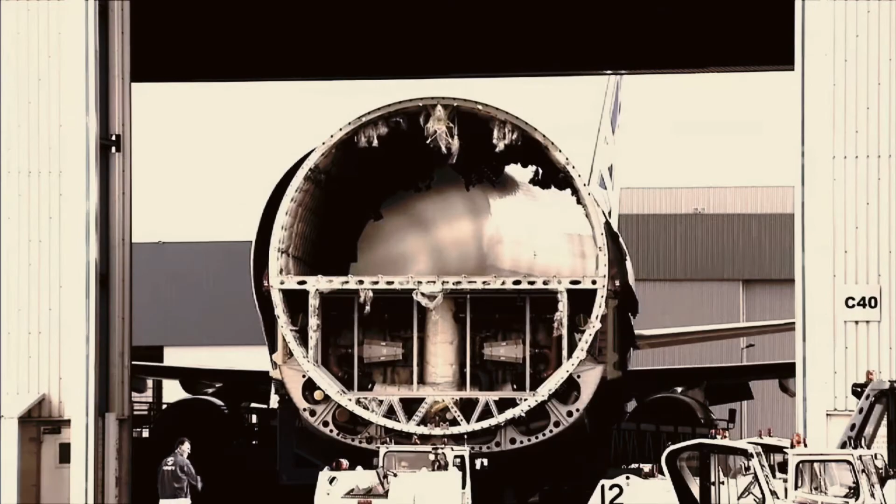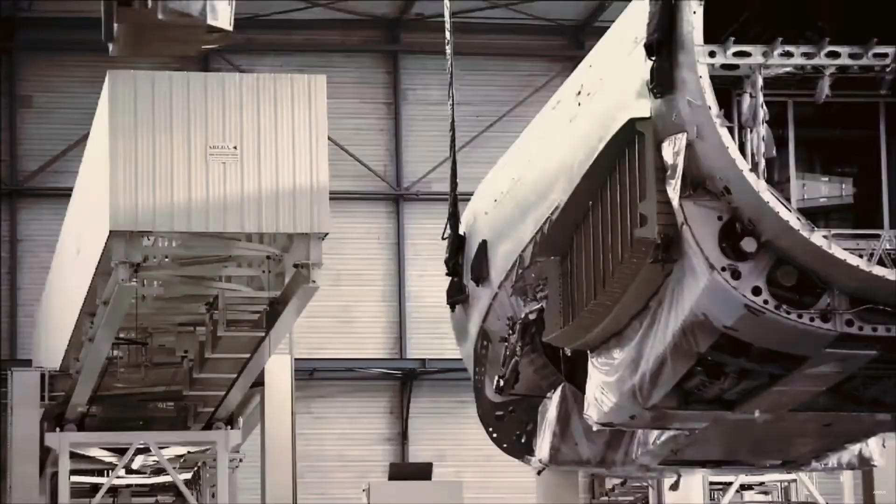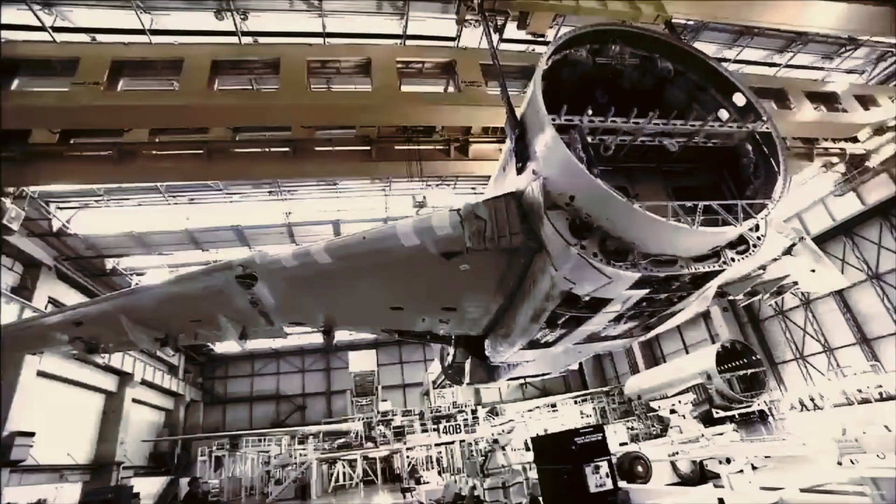The details of what happens next in the story of 447 are complex. Unlike other presentations on the subject, the objective here will be to give the viewer an in-depth understanding of Airbus design philosophy and a deeper understanding of how the relevant systems on the 330 actually work.

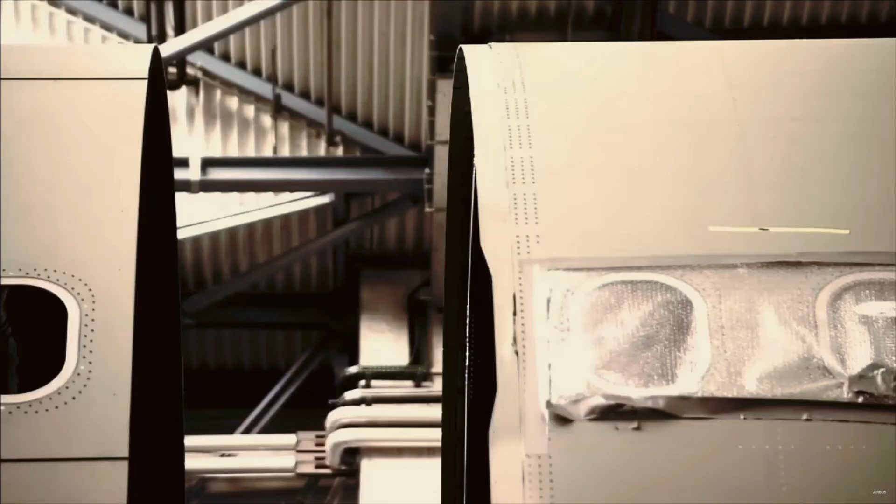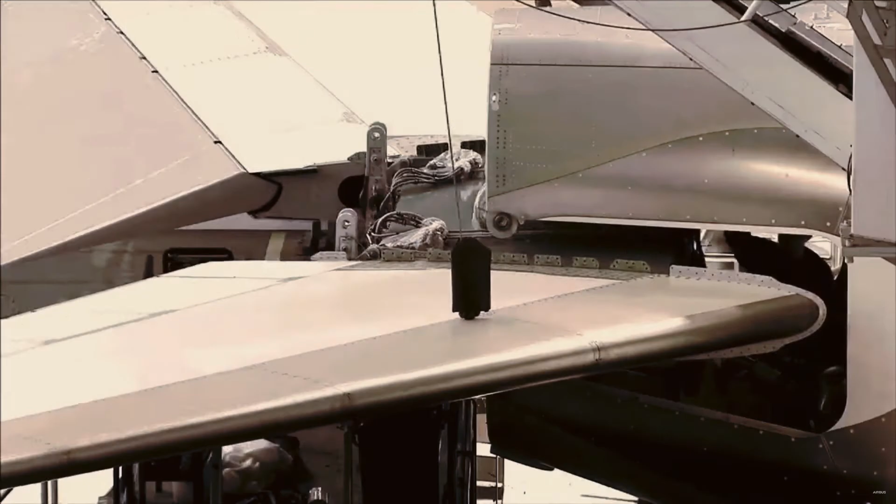In doing so, the hope is that you'll be better placed to understand what the pilots did, how the aircraft behaved, and why at times the interaction between both was less than efficient and ideal. The finer points of our excellent investigation can often prove difficult to comprehend, and without this comprehension, the true story behind the facts can remain elusive and frustrating.

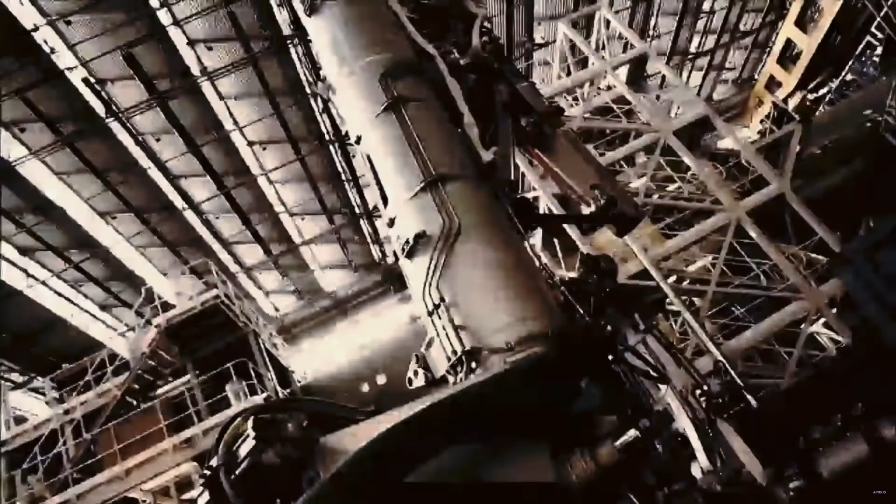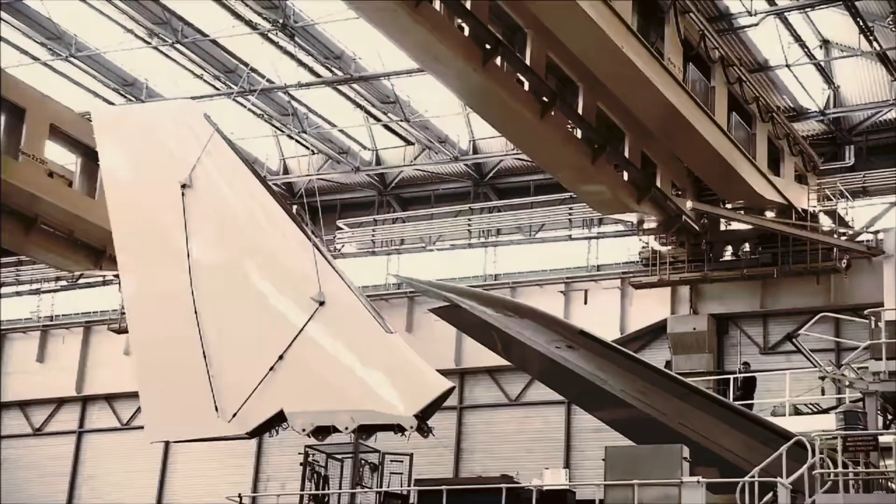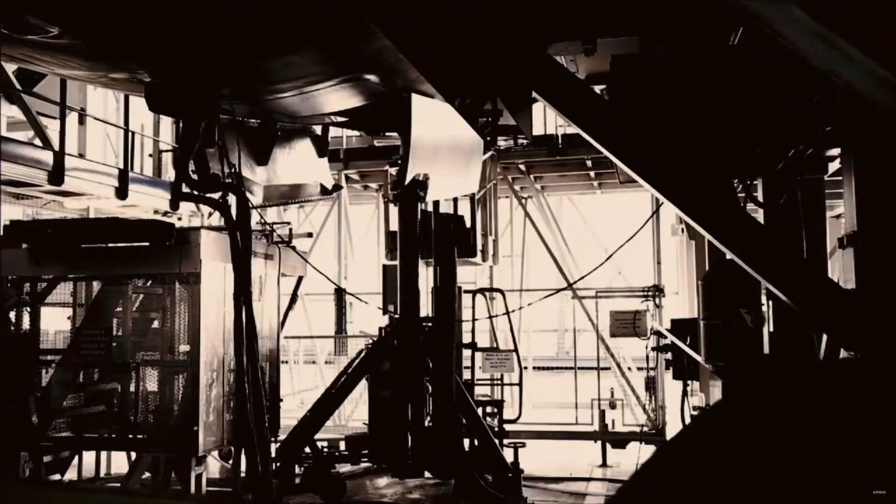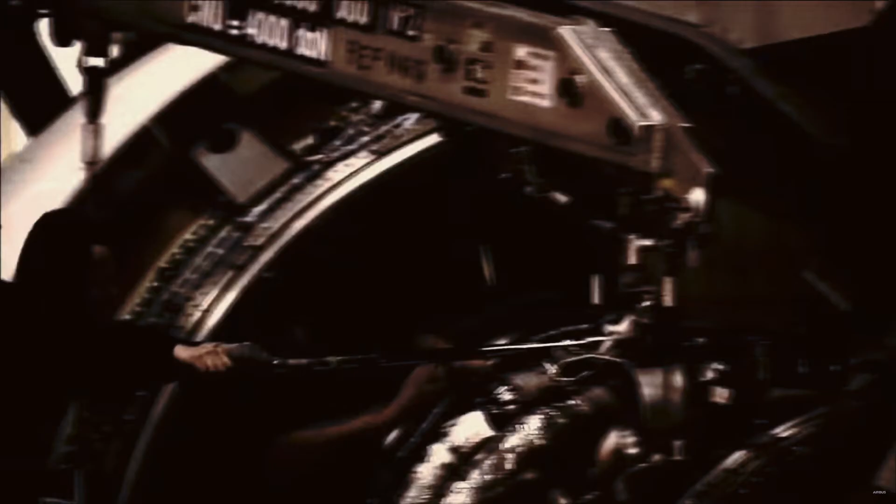Stay with me over the next while as I explain the concept behind Airbus's design philosophy and lift the lid on some of the vital aircraft systems and aerodynamic principles which play a significant part in the story of Air France 447. Fly-by-wire and pilot side-stick logic, flight directors, why we use them and how they operate, flight control laws and their reconfiguration, ECAM, the means by which the 330 communicates failure information to its pilots, and the intricacies of the pitot system around which the whole event hinges. And finally, the aerodynamic stall itself. What causes it? How is it identified? And how, if unfortunate enough to find ourselves in one, do we recover? Armed with this information, the complexity of what will be presented in episode 2 of this story will, I hope, be a little bit more comprehensible.

The accident aircraft shown here, registration Foxtrot Golf Zulu Charlie Papa, is a 330-200 series aircraft, retailing at a whopping $238.5 million US. The 330-200 type first flew in 1997, having been predated by its sister, the A330-300, in November 92. It's a direct technological descendant of the A300, 310 and 320 aircraft before it.

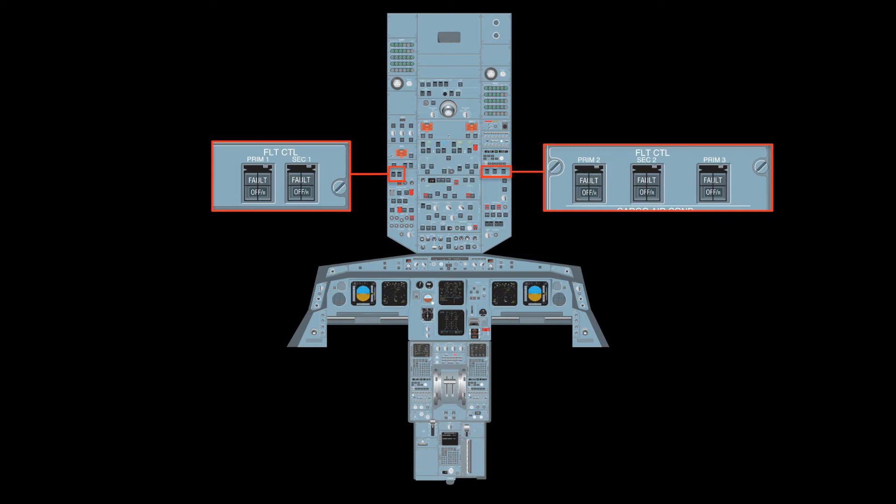At its introduction into service, the A330 represented the pinnacle of Airbus fly-by-wire research and development. Fly-by-wire is a system that replaces the conventional manual flight controls of an aircraft with an electronic interface. The pilot's actions in the cockpit are converted into electronic signals transmitted by wires, hence the fly-by-wire term, to flight control computers, of which the 330 has 5, each controlled by a guarded switch on the overhead panel. The purpose of the computers is to determine how to move the actuators at each control surface to provide the ordered response. With the 330 design, flight control computer failure is supported by shifting the failed unit's responsibilities onto the remaining computers, thereby utilising a non-mechanical backup system, with the one exception of the rudder.

As the pilot now generates an electric signal to be interpreted by the flight control computers, there is in fact no physical need for the traditional large yoke most commonly seen in earlier conventional aircraft. Instead, Airbus have replaced the traditional yoke with a side stick, located adjacent but forward of each pilot's seat.

Fully fly-by-wire systems interpret the pilot's control inputs as a desired outcome and calculate the control surface positions required to achieve that outcome. This results in various combinations of rudder, elevator, aileron, flap and engine controls in different situations using a closed feedback loop. The pilot may not be fully aware of all the control outputs acting to affect the outcome, only that the aircraft is reacting as expected.

In effect, the pilot through the side stick tells the aircraft what to do, without being concerned how this is actually being achieved. The fly-by-wire computers act to stabilise the aircraft and adjust the flying characteristics without the pilot's involvement, and to prevent the pilot operating outside of the aircraft's safe performance envelope. In other words, Airbus's fly-by-wire philosophy takes advantage of a system's ability to limit pilot demand so as to not allow deliberate acts which would prove detrimental to safe operation, for example a stall, overspeed or overbank.

Much has been made of the different manufacturers' approach to fly-by-wire philosophies. Some naysayers describe the protections which the system can provide as the pilot wanting something and the computer deciding if they will actually allow it. This implies that the pilot always knows best, should always be obeyed, and should be left with the final authority as to whether it's appropriate or not to bring the aircraft deliberately outside the normal flight envelope.

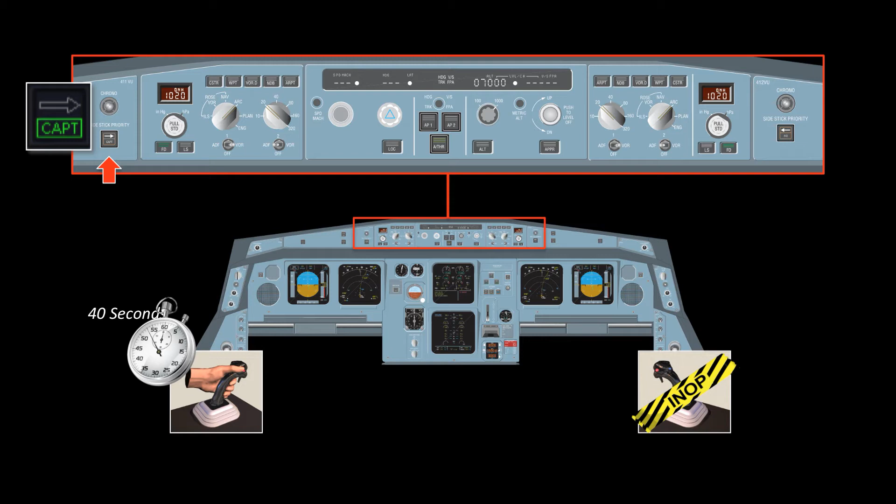A flight director system is an instrument system consisting of electronic components that compute and indicate the aircraft's attitude required to attain and maintain a pre-selected flight condition. These pre-selections of pitch and roll are made by way of selections on the FCU, positioned on the glare shield between both crew members, displayed by means of a dedicated on-off switch, one for each pilot.

Once selected on, command bars on the respective primary flight display show the pilot how much and in what direction the attitude of the aircraft must be changed to achieve the desired result. The flight director incorporated on the A330 comprises 2 green bars forming a crosshair. The horizontal bar provides the pilot with pitch guidance to the selected target, while the vertical bar provides roll guidance. The computed command indications relieve the pilot of many of the mental calculations required for instrument flight, such as interception angles, wind drift correction, and rates of climb and descent.

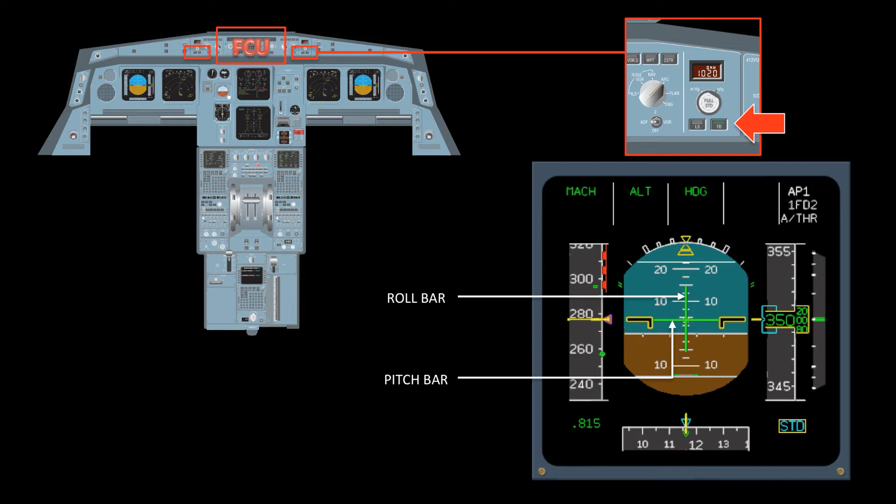Thus they are used almost continuously, providing an extremely strong visual connection between pilot input and resultant aircraft behaviour. By way of example as to how the flight directors will appear to the pilot, have a look at the following examples. The aircraft's orientation is represented by the airplane symbol mid-screen.

In the diagram to the left of screen, the FMA is indicating alt cruise. What this means is that the flight director pitch guidance is for the pilot to maintain the target altitude, which in this case will be 15,000 feet. However, the aircraft is not flying level, but rather descending through about 14,300 feet at a rate of 5,900 feet per minute. As a result, in order to correct the situation and return to the target altitude of 15,000 feet, the pitch bar of the flight director is instructing the pilot to raise the nose of the aircraft, or to pitch up.

This descending turn is also taking the aircraft away from its assigned heading, which is indicated here as 300 degrees. Therefore, in the context of roll, the flight director roll bar is providing guidance to simultaneously turn left to reacquire the target heading.

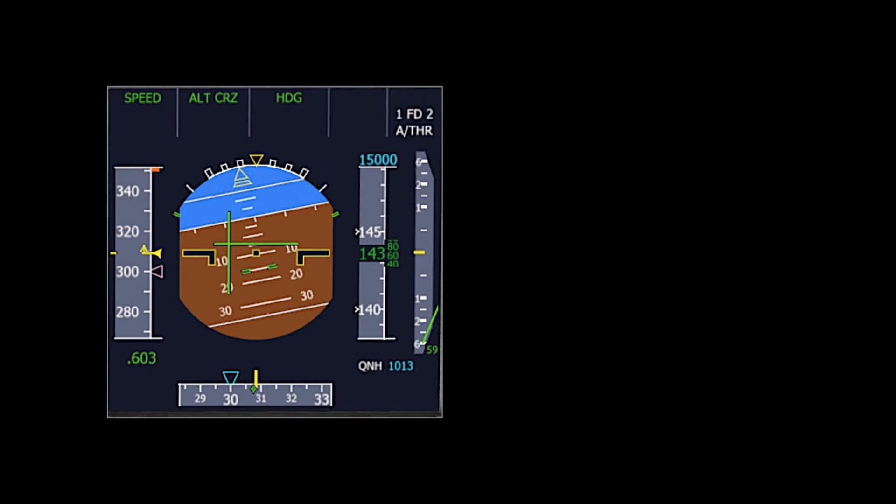With regard to the second example on the right, here the aircraft has deviated above the target altitude and drifted off the assigned heading to the left. As a result, to reacquire the assigned altitude and heading, the flight director bars are commanding a pitch down and simultaneous turn to the right.

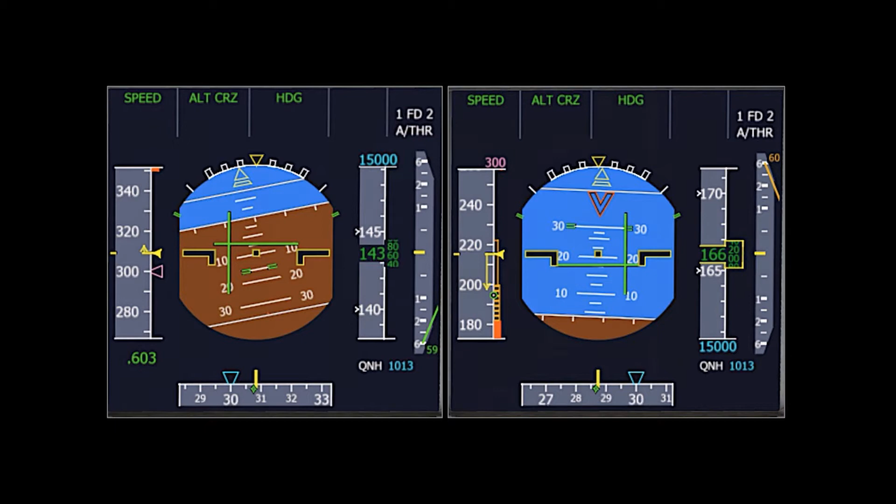Why these flight directors are important in the context of 447 is that by design, when the aircraft is flown intentionally or otherwise to extremes of pitch or roll, the flight directors are automatically removed from view. The logic is that removing them in such extreme attitudes allows the pilot to concentrate solely on correcting the abnormal state without the distraction of flight director commands, which are most likely irrelevant under the circumstances.

Provided they are not switched off in the interim, as the aircraft returns to more normal attitudes, the flight directors will reappear. However, as was the case prior to this accident, when they reappear, they do so in the basic modes of heading and vertical speed, irrespective of what modes they were in previously, adopting the aircraft's current trajectory values of pitch and roll as the new guidance values.

By way of example, assume the aircraft was navigating direct to a navigation beacon and maintaining level flight. The flight director would be centered, forming a cross on the PFD, centered on the aircraft symbol, providing no pitch or roll corrections, as none were necessary with the aircraft navigating as it should.

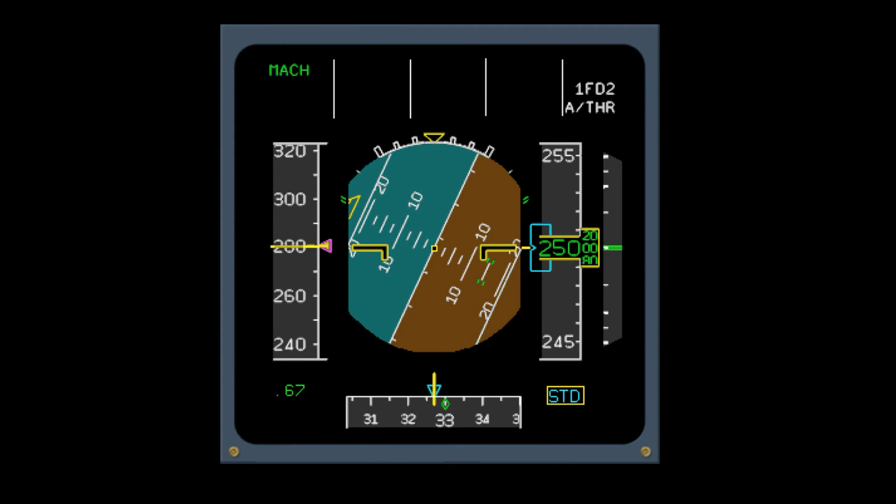Subsequently, the aircraft experiences an upset. This could be due to environmental or technical issues, or perhaps even triggered by mishandling on the part of the pilot. Regardless, the aircraft banks hard to the right. Assuming the bank angle exceeds 45 degrees, the flight directors will be removed from view. As the aircraft recovers and the bank angle is reduced below 40 degrees, the flight directors will reappear.

However, when they reappear, they will show guidance to maintain both the aircraft's current heading and vertical speed. In other words, no longer are the flight directors providing guidance to the initial navigation aid while maintaining level flight. Now they command the pilot to maintain the current aircraft heading and the instantaneous rate of climb or descent which existed at the moment they reappeared.

In the case of 447, the instantaneous vertical speed adopted by the flight directors as they reappeared directed the pilots to maintain a rate of climb which was completely inappropriate given their increasing angle of attack.

Following the accident, the BEA made a recommendation that such flight director behaviour be modified, that in future, on their reappearance, the flight directors would re-engage on the original modes, thus continuing to provide valuable information to the pilot on how to recover back to the initial trajectory. This recommendation was subsequently accepted and implemented by Airbus, so that all 330s and 320s worldwide now operate to a safer code of practice.

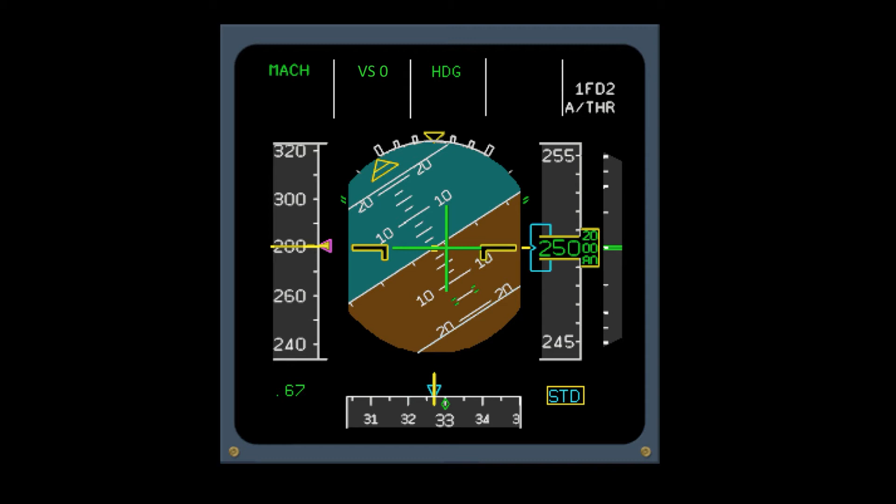Normal law is the default control law, and consequently this is where the aircraft operates for the vast portion of any given flight. The only time the aircraft moves outside of this control law is either by design in order to execute the takeoff and landing maneuvers, in which case the laws are deliberately modified slightly, or subject to some in-flight technical malfunction, the consequences of which will no longer facilitate the application of normal law, and the aircraft control laws are subsequently downgraded.

In the context of pitch in normal law, the aircraft responds to side-stick forward and aft inputs in order to generate a G-load pitch rate response, where a pitch-up demand at high speed will generate a high vertical acceleration or G-load for a modest actual pitching rate. The converse is true at low speed, where a given pitch input produces a lesser vertical acceleration or G-load proportional to the actual pitch rate.

For this reason, when we talk of pitch commands in normal law, we're actually talking of a blended pitch rate and G-loading output to satisfy flight control input demands being made by the pilot.

Normal law incorporates automatic pitch trim. When the pilot makes a pitch input through the side stick, the flight control computers command the pitch with elevator, then automatically trim the horizontal stabilizer in order to keep the elevator in an average neutral position. Were this not to be the case and the aerodynamic loading was to be held by the elevator alone, any subsequent request made of elevator travel may in fact not be possible, with the obvious disastrous implications this would have for safe manoeuvrability of the aircraft.

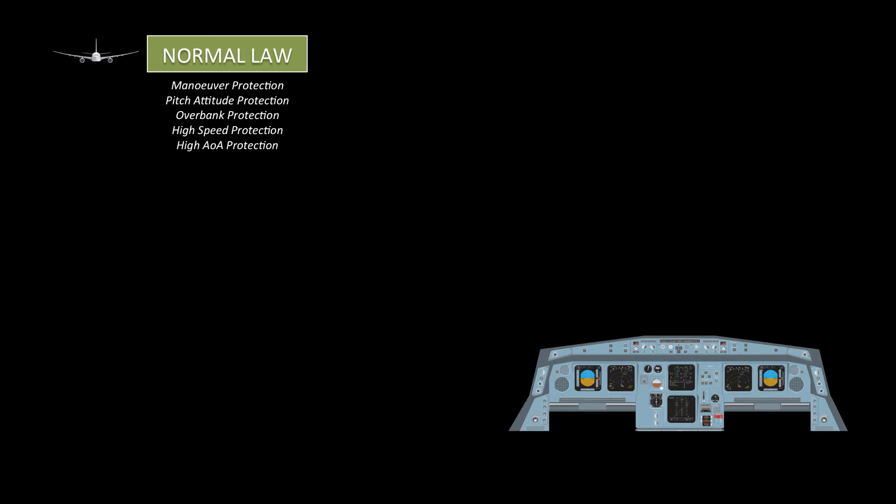This specific protection is designed to prevent the aircraft from stalling and to ensure optimum performance in extreme manoeuvres such as wind shear or ground proximity warning system recovery. This protection takes priority over all others. Angle of attack is the angle formed by the chord of the airfoil and the direction of the relative wind, or the vector representing the relative motion between the aircraft and the atmosphere. In simplified terms, it can be described as the difference between where the wing is pointing and where it's going.

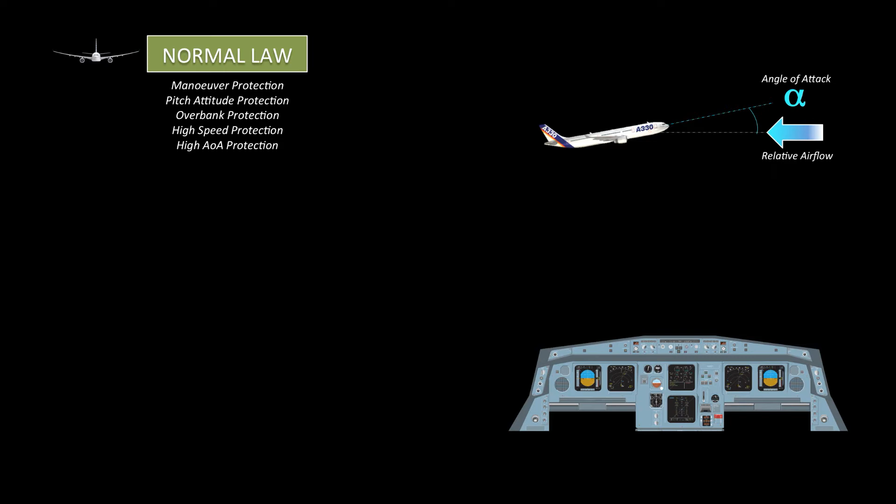Why is it important and why have it protected? Well, as the angle of attack is increased, the lift produced by the wing will also increase, up to a point. This point is called the critical angle of attack. Beyond this value, the airflow can no longer follow the curvature of the airfoil and begins to separate. Lift is lost and the aircraft is said to have stalled.

With no angle of attack indicator on the 330 cockpit, this protection, although triggered by an increasing angle of attack, manifests itself to the pilots through the speed tape on the primary flight display. As speed decreases, it reaches VLS, the lowest achievable speed with auto thrust engaged. This is indicated as the top of the hollow amber bar at the lower end of the speed tape. Auto thrust, if engaged, will apply engine power to stop any deceleration below this value in order to limit the angle of attack being flown.

With auto thrust inoperative or not engaged, the speed can reduce to the first level of angle of attack protection, V alpha prot, which is shown as the top of the amber and black band. At this indicated airspeed, the actual angle of attack which has been reached will trigger the high angle of attack protections. The autopilot, if engaged, will disengage, and the flight control computers will lower the nose in order to maintain a maximum angle of attack equivalent to V alpha prot.

And with the side stick in the neutral position, any bank on at the time will be removed and the aircraft rolled wings level. The maximum bank angle achievable will also be reduced from 67 degrees to 45 degrees in order to mitigate potential G-loading of the aircraft, which could act to exacerbate the already high angle of attack condition.

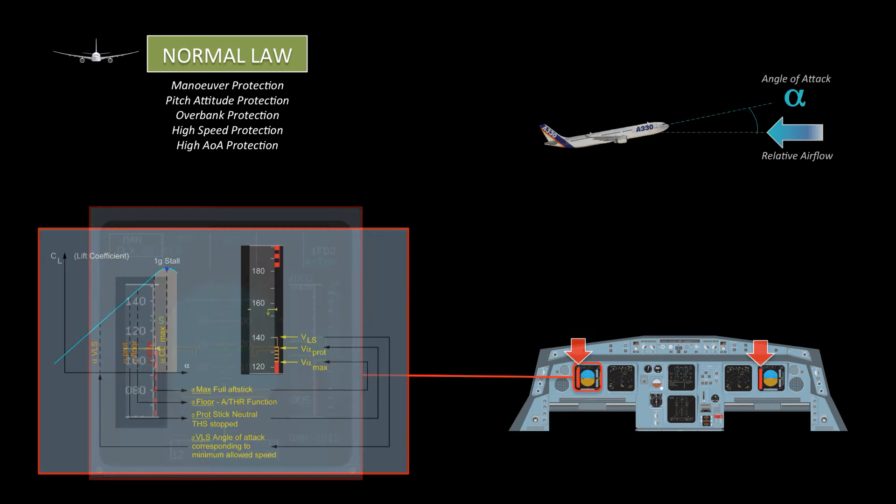A single system failure would not result in the loss of normal law. However, multiple failures of flight controls, hydraulics, or electrical system components may result in degradation. The level of degradation will depend on the severity of the failure. Usually, where degradation occurs, the downgrade is from normal to alternate law.

Along the longitudinal axis, load factor demand remains the same as normal law. In other words, despite any possible degradation, in pitch the aircraft behaves the same regardless of whether it's in normal or alternate law.

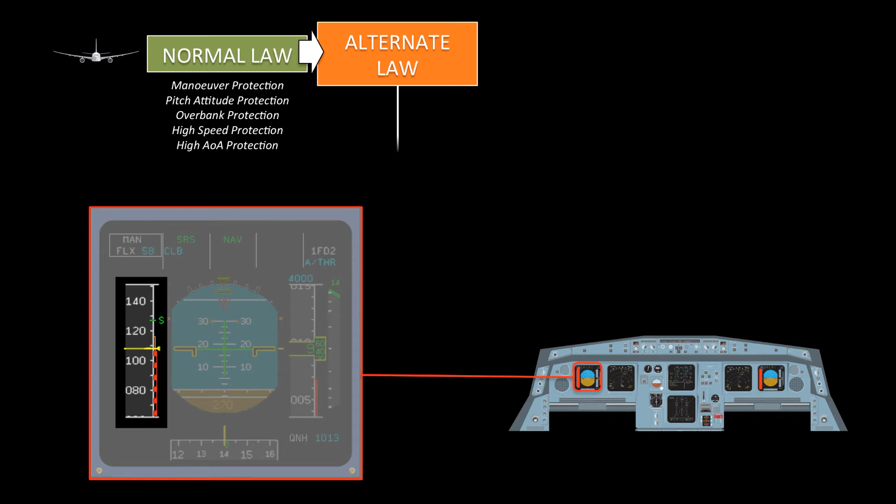Along the lateral axis, that is in roll, things are somewhat different depending on which subsection we find ourselves in. In alternate law 1, roll command remains a rate of roll command similar to normal law. In alternate law 2, however, roll control is conventional in nature, insofar as flight control surface deflection is proportional to side stick deflection. That being the case, roll sensitivity is proportional to airspeed, with the feel to the pilot being a lot more sensitive. Around the yaw axis, damping is available, albeit with limited authority.

Significantly, however, whether the aircraft has been downgraded to alternate law 1 or 2 isn't apparent to the crew. In alternate law, most of the protections we have come to take for granted in normal law have been lost. However, in most circumstances, these have been replaced with stabilities.

In normal law, if the pilot's intention is to fly the aircraft deliberately outside the normal flight envelope, the flight control computer simply won't allow it. With alternate law stabilities, however, the flight control computers, although still sensing impending danger, will only act to suggest that this course of action is inappropriate. They will make modest efforts to restrict pilot actions, but where the pilot remains determined in his efforts, he will be able to drive through these stabilities and do with the aircraft what he wishes, even if this does take the aircraft outside of the normal operating envelope.

The following example illustrates the point. In the case of a high angle of attack protection, we've already reviewed how the aircraft will behave in normal law. In alternate law, the situation is somewhat different.

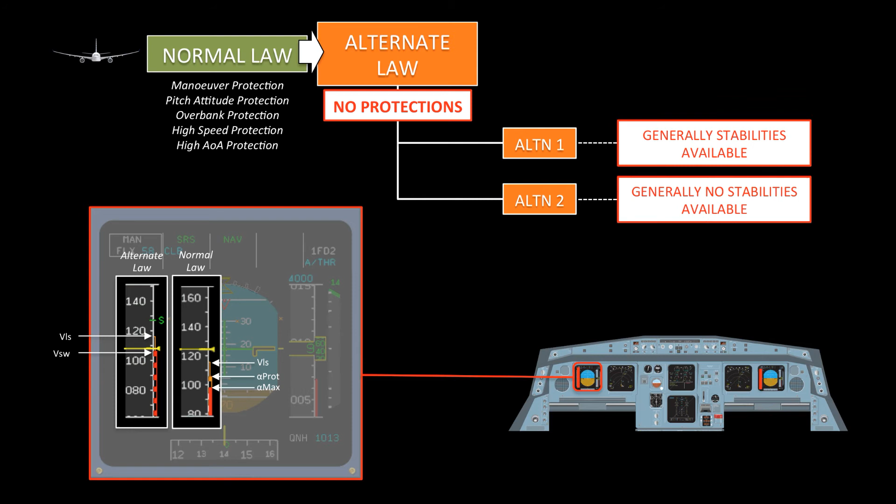In the context of Air France 447, the environmental conditions the aircraft will encounter will severely impact on the aircraft's ability to compute an accurate airspeed using the onboard air data reference units, or ADRs. With 3 ADRs fitted to the aircraft, if one source diverges greatly from the other two, it is voted out or rejected by the PRIM, the primary flight control computer. In such circumstances, with 2 sources of data remaining, the flight control laws will remain in normal law.

However, as will be the case with 447, if the remaining two data sources themselves begin to diverge from each other, the aircraft becomes completely unsure of its actual speed, as it sees no individual source as being truly correct. The PRIMs will subsequently reject both remaining sources of information, and the flight control laws will be reconfigured to alternate law 2. Furthermore, the rate at which the indicated airspeeds in the cockpit diverge away from the average figure of the data source is in itself a consideration for reconfiguration.

A loss of indicated airspeed of more than 30 knots within a 1 second time frame will also initiate reconfiguration to alternate law 2 and cause the subsequent disconnection of the autopilot. This is exactly what will happen to 447.

Direct law and mechanical backup are further degradations of the control laws, but having no relevance to our study of 447, these have been overlooked here.

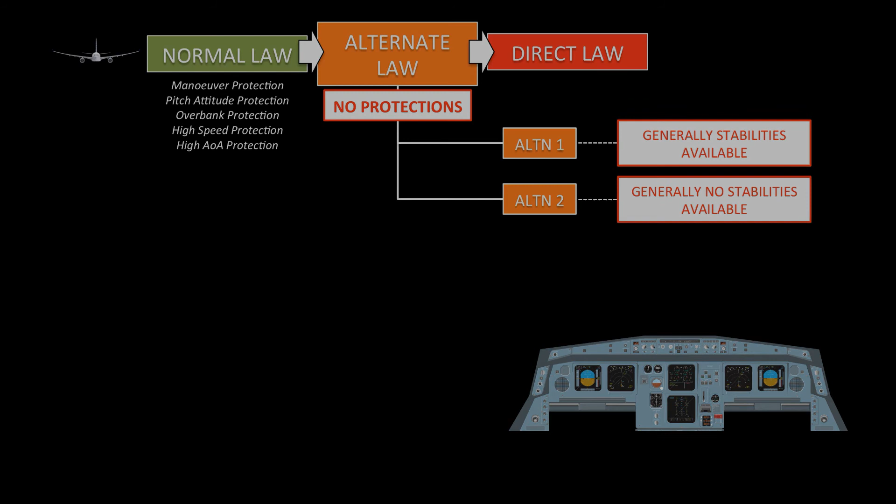An important aspect of understanding the individual events of this particular accident is an insight into how the aircraft communicates technical defects to the crew. Pretty much all aircraft use some level of warning to grab the pilot's attention, be that visually, aurally, or more commonly both, and in this regard the 330 is no different.

Essentially, the warning and alerting system centres around two electronic boxes called the System Data Acquisition Concentrators, or SDACs. These units monitor in real time all the various systems of the aircraft. If they detect an anomaly, or worse, a defect of any sort, they immediately forward that information to a pair of flight warning computers for immediate generation of appropriate visual and aural alerts.

These visual alerts are displayed in both pilots' line of sight by respective red warning or amber caution lights on the glare shield. Accompanying aural alerts are simultaneously broadcast through the cockpit loudspeakers, left and right side.

Further, the SDACs also send this warning information to the respective display management computers, or DMCs, which visually identify the failure and its associated checklist response on the upper or engine warning display screen, while at the same time, if applicable, also depict the affected system in diagrammatic form on the lower or system display screen. The system in its entirety is called ECAM, Electronic Centralized Aircraft Monitor.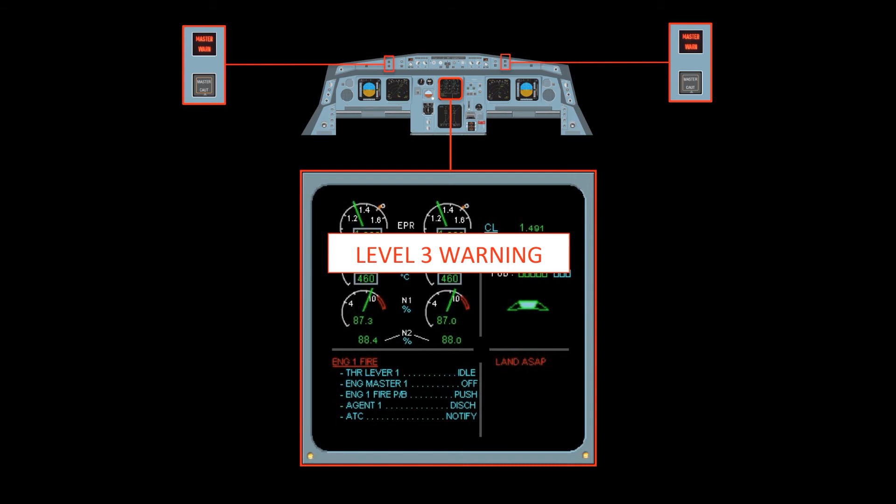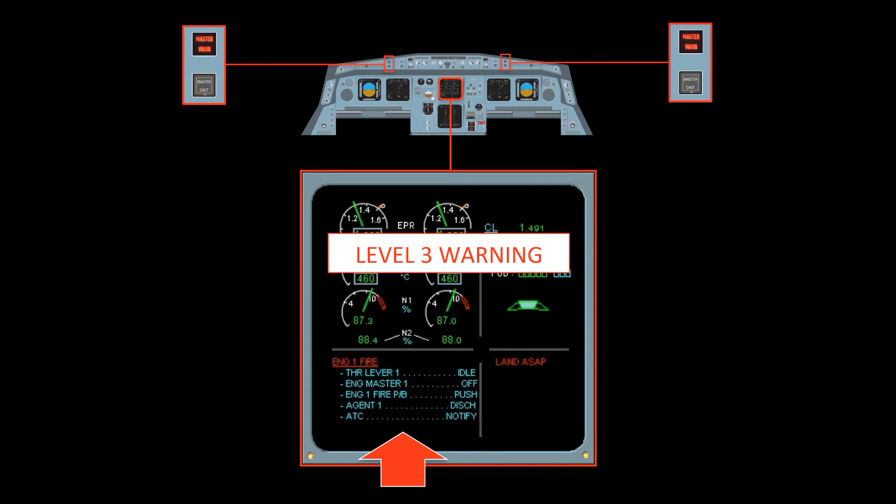On activation of a Level 3 warning, the glare shield attention getters will flash red while a continuous repetitive chime is heard in the cockpit until acknowledged and silenced by the crew. On the EWD, the nature of the warning is displayed. In this instance, a number 1 engine fire, with the appropriate checklist items requiring action by the crew being displayed below in blue. As the crew action each item on the checklist, the associated line is automatically removed. Once all the lines have been removed, the checklist is deemed to have been completed.

Of a lesser priority are the Level 2 cautions. These items, being of lesser importance, are displayed in amber, and by definition, although still important, need not be addressed with the same haste as the Level 3 warning. On activation of a Level 2 caution, the glare shield attention getters will illuminate steady amber, while a single chime will be heard in the cockpit.

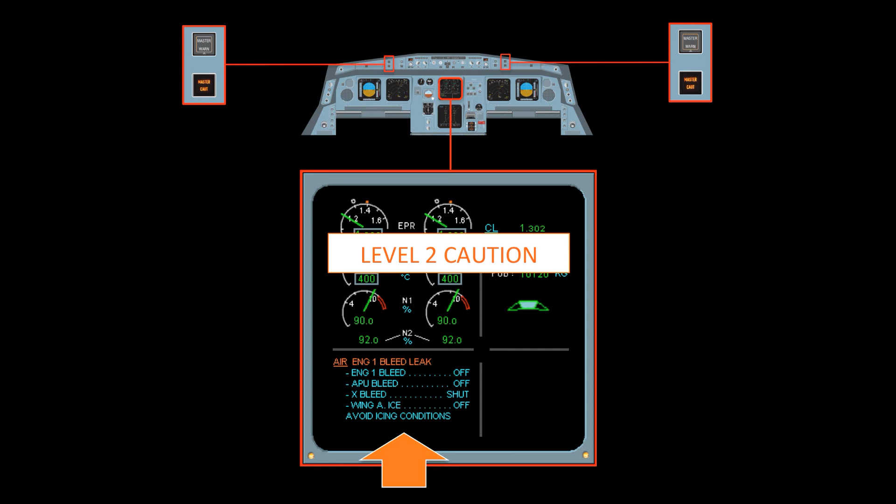On the EWD, the nature of the warning is displayed. In this instance, a number 1 engine pneumatic bleed leak. Once more, the appropriate checklist items requiring action by the crew are displayed below in blue. As the crew action each item on the checklist, as before, the associated line is automatically removed.

The lowest of all cautions is the Level 1 caution. Being of least importance when displayed, unlike the previous Level 2 caution, these Level 1 cautions will not generate any visual or aural warnings for the crew. Another obvious difference between these and the previous Level 2 cautions is that they have no associated action items. Indeed, the Flight Crew Operations Manual simply states that the only subsequent crew action is awareness. The example on screen shows a typical Level 1 caution associated with a digital flight data recorder fault.

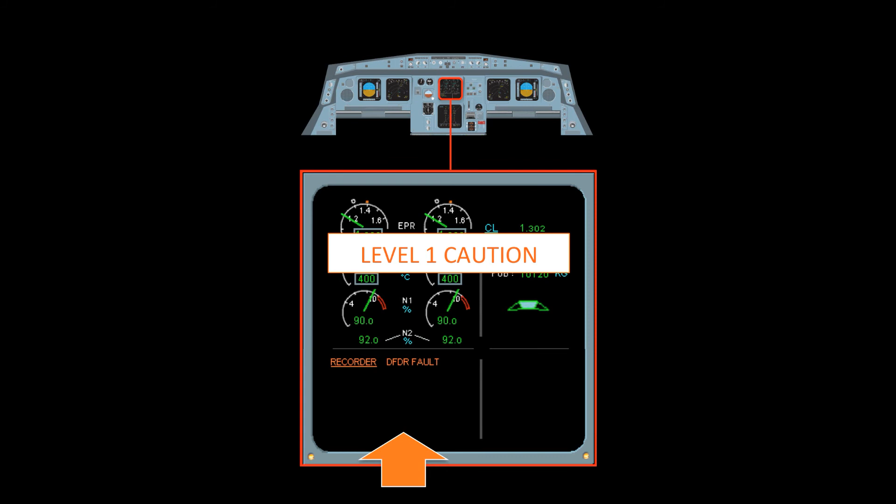The level below these cautions is referred to as the advisories, as they have no significance in explaining the events surrounding Air France 447. For the sake of brevity, I've chosen to overlook them here.

What is, however, extremely relevant is an understanding of how ECAM prioritises the failures that it reports. If we go back for a second to the previous example of the Level 3 warning concerning the engine 1 fire, if while working through the checklist ECAM actions, the system detects a further failure, the DFDR for example, as this new failure is only a Level 1 caution, ECAM will place it below the Level 3 warning for attention by the crew once the failure of higher priority has been addressed.

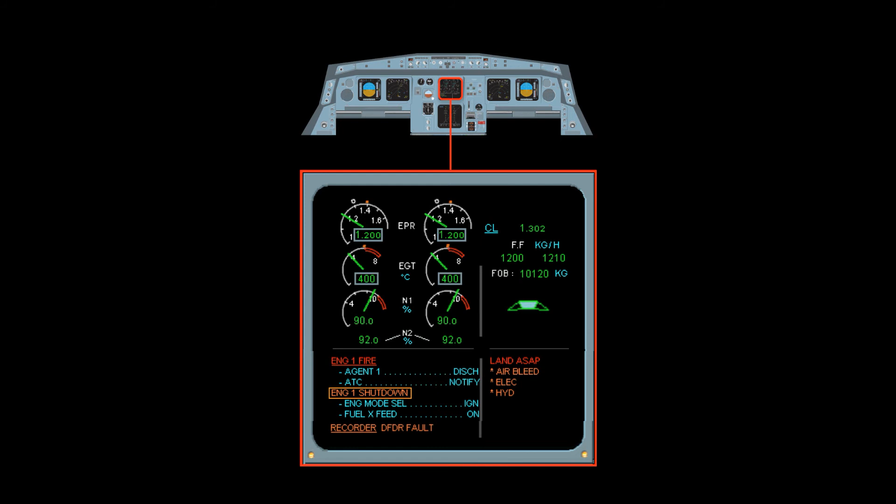As we continue with our execution of the checklist, suppose the autopilot was to be inadvertently disengaged. Autopilot failure or inadvertent disengagement is classified as a Level 3 warning. Indeed, so is the engine fire. However, on the assumption that the crew do not wish to impact the ground while executing the engine fire drill, the autopilot disengagement is now reclassified as the most important issue for the crew to address.

This very situation, however, highlights some of the potentially more complex aspects of working one's way through the ECAM display. For example, where's the FDR fault now? It was in view only a few seconds ago prior to autopilot disengagement.

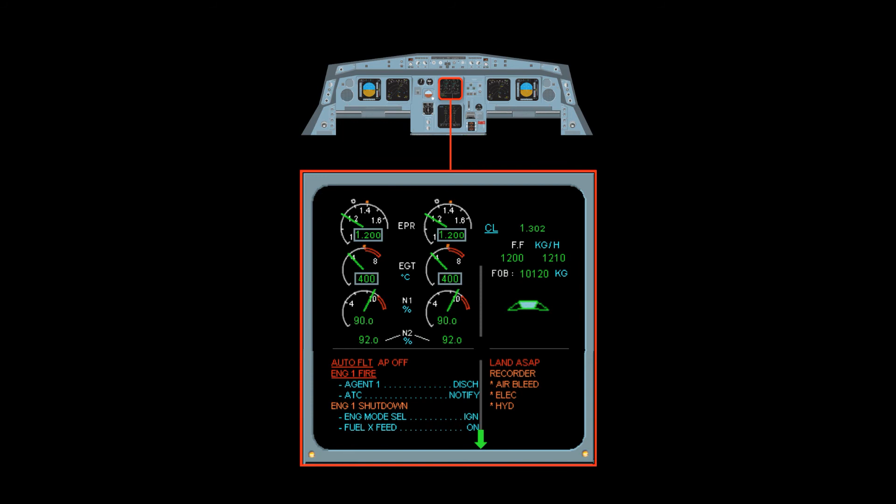Well, it's still there, just not visible at the moment, because the physical dimensions of the lower part of the EWD will only facilitate 7 lines of text. Prioritization of the autopilot off message has bumped the DFDR fault into the overflow section. The newly appeared green arrow at the bottom of the page draws the pilot's attention to this fact, and the title of the failed system, namely recorder, being queued on the lower right hand side of the screen, also indicates that as the drill is completed and lines are systematically removed from the screen, the free space this creates will be filled in time once again by the recorder DFDR fault message.

Every day, thousands of Airbus aircraft take off and land all over the world, in total safety for passengers, freight, and of course the crews. However, because not all flights are ever quite the same, unexpected and rare events may happen, requiring a calm recovery reaction from the crew. The stall is one of these unexpected events.

Here the crew must fully understand what is going on to be able to adapt and control the situation, with one sole aim: recover the aircraft. So it is possible to recover an Airbus from a stall situation.

Over and above the currently published documents that resulted from collaborative work between aircraft manufacturers and air safety organizations, we would like to go further in explaining the characteristics of the stall phenomenon, and specifically how to recover from a stall. For all pilots, the top priority is to clearly identify an approaching stall, so that the stall itself can be avoided. However, should one be encountered, then the correct recovery actions must be taken immediately.

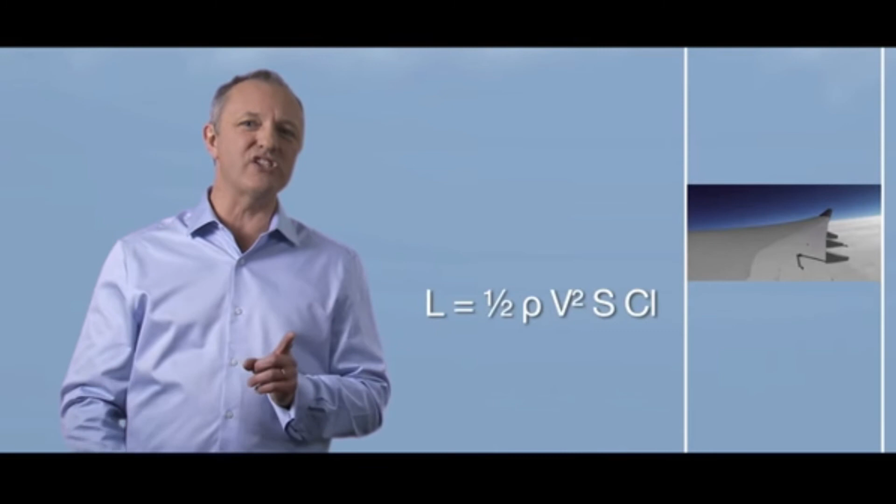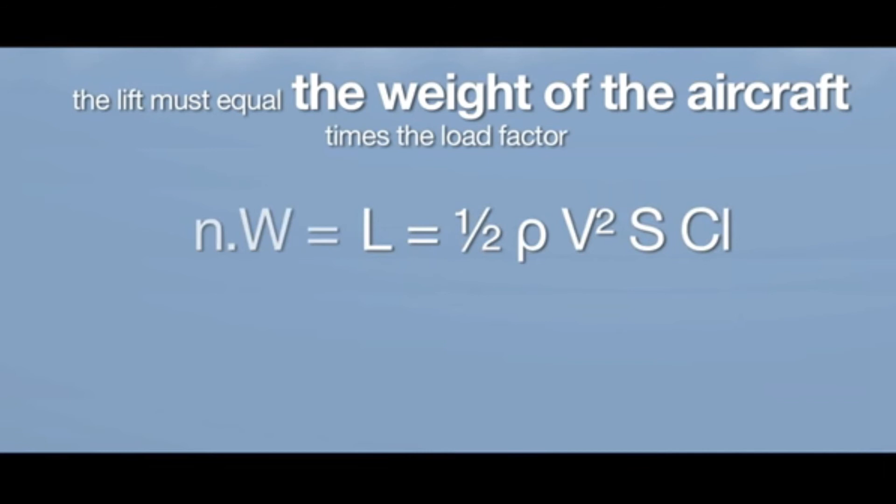A stall is characterized by a loss of control, then by a loss of height. A wing generates lift, where L equals a half rho v squared S CL. The lift must equal the weight of the aircraft times the load factor. L equals N times W, where N equals load factor, W equals weight. The general lift equation becomes N times W equals L equals a half rho v squared S CL.

The CL of the wing increases with the angle of attack up to a maximum CL max. Any further increase of angle of attack above this angle of attack of CL max will make it impossible for the airflow to smoothly follow the upper wing surface. The flow will separate from the surface, causing the CL to decrease and drag to increase.

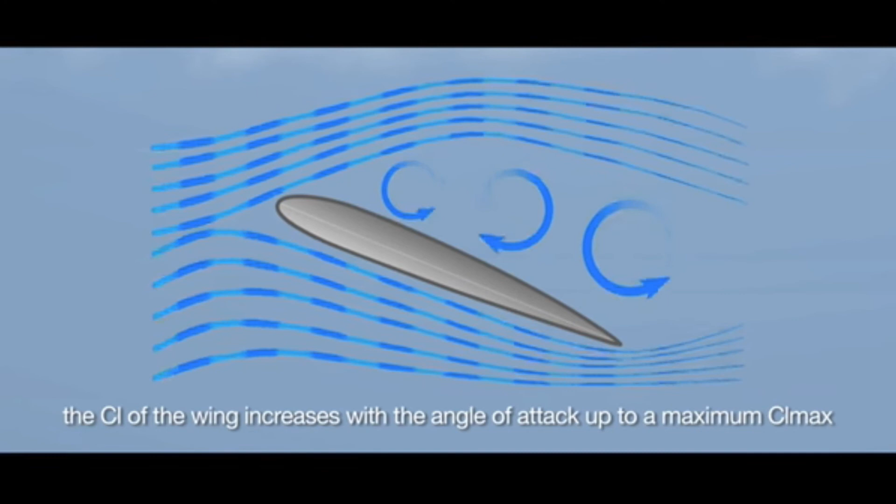On this graph, we can clearly see that the angle of attack increases from zero lift value. The curve is linear over a big range. When the flow separation begins, the slope of the curve begins to fall off. The lift reaches a maximum and begins to decrease. The angle of attack at which it starts to decrease is the stalling angle of attack, or critical angle of attack. This corresponds to the value of CL max.

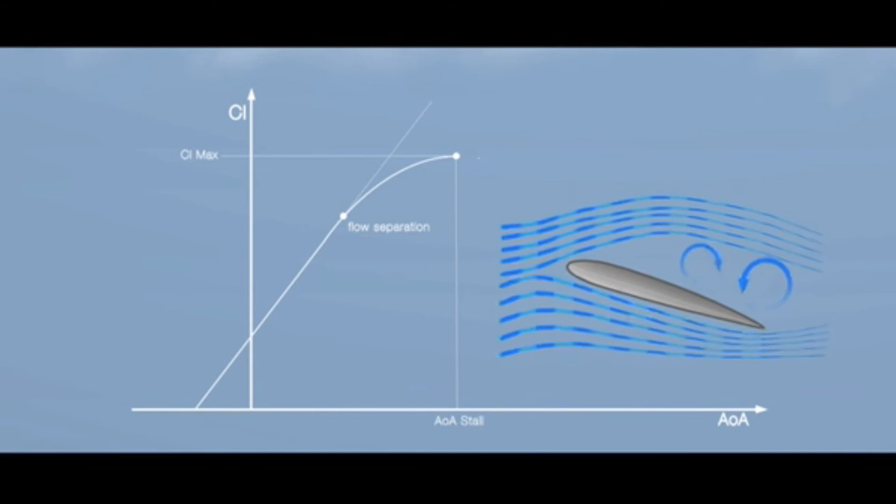One can clearly notice that to recover from a stall, or to prevent a stall, the angle of attack must be decreased to below this CL max value.

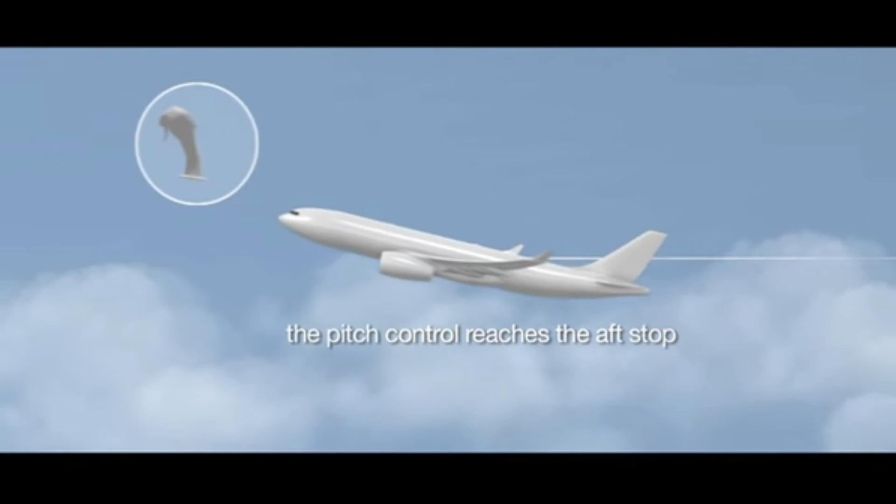The aircraft is considered stalled when the behavior of the aircraft gives the pilot a clear and distinctive indication that the aircraft is stalled. Indications of a stall, occurring either individually or in combination, are: a nose-down pitch that cannot be readily arrested; buffeting of a magnitude and severity that becomes a strong and effective deterrent to further speed reduction; the pitch control reaches the aft stop; and it is impossible to stop the aircraft from descending.

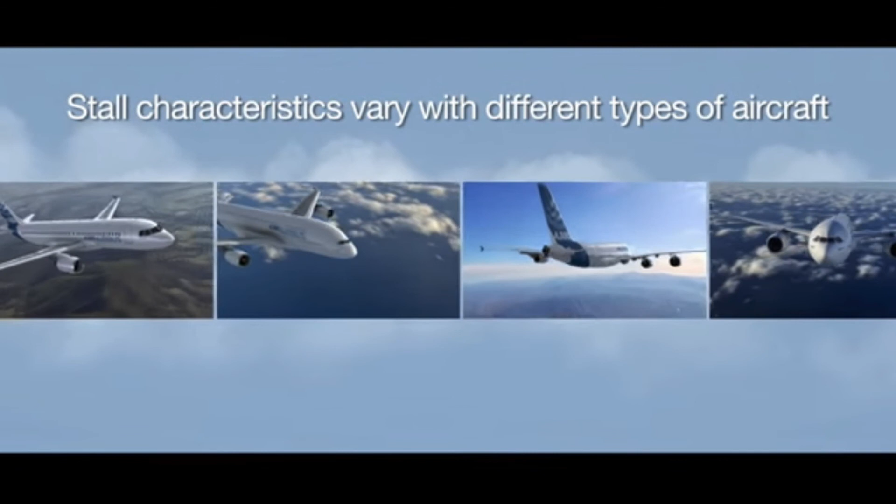Stall characteristics vary with different types of aircraft. However, for modern aircraft during most normal maneuvers, the onset of the stall is gradual. The first indications of an approaching stall may be provided by any or all of the following: unresponsive flight controls, a stall warning or stall prevention device, significant uncommanded roll at the stall, or aerodynamic buffeting.

The transition from approaching stall to stall is sometimes difficult to identify precisely. Therefore, the two phases should be treated as the same from a recovery point of view.

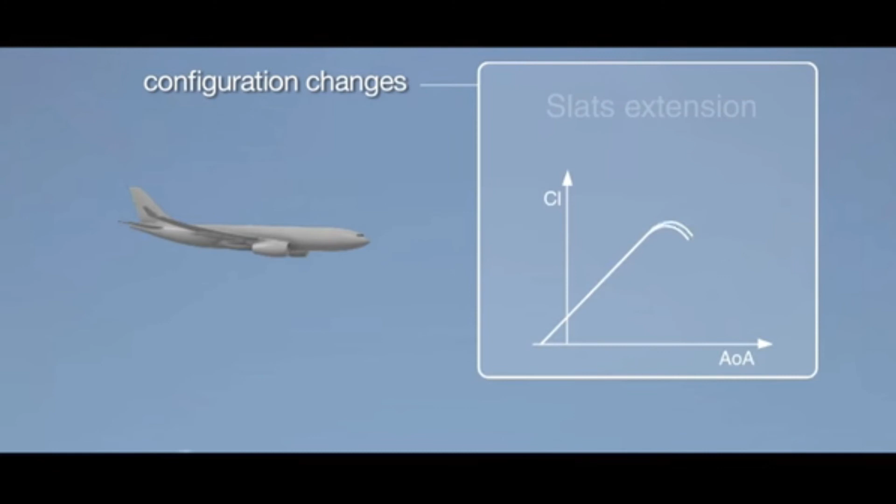Factors that affect the stall speed are: change in weight, maneuvering the aircraft increasing the load factor, and configuration changes. This is how the CL versus angle of attack changes with slats extension, flaps extension, speed brakes extension, and finally wing contamination.

Let's see how the CL max varies with the Mach.

Remember the general lift equation: N times W equals L equals one half rho V squared S CL. Expressed in Mach condition, it becomes N times W equals L equals 0.7 P Mach squared S CL.

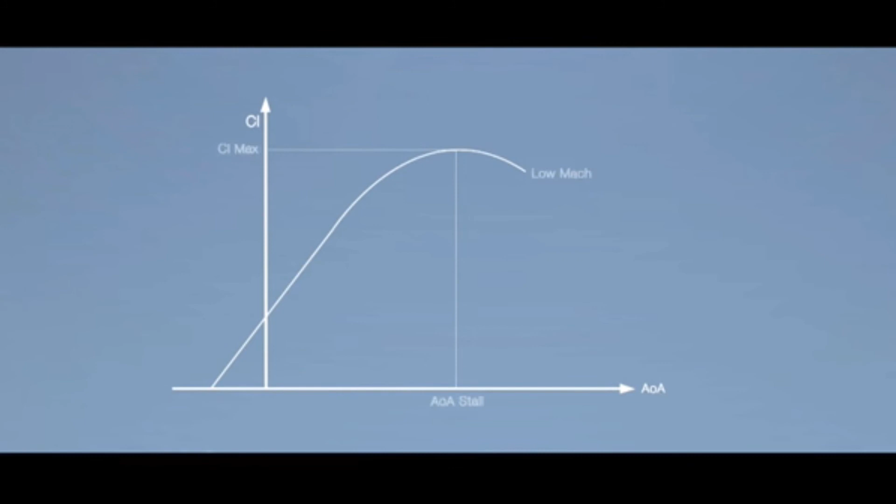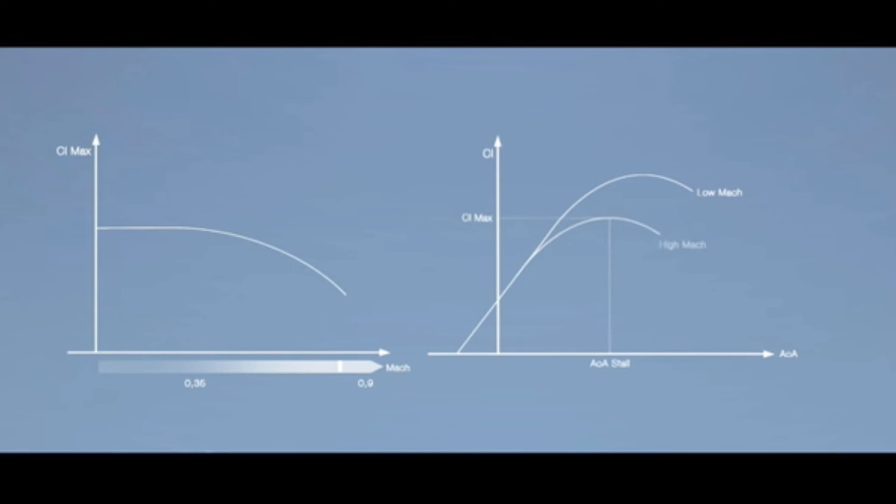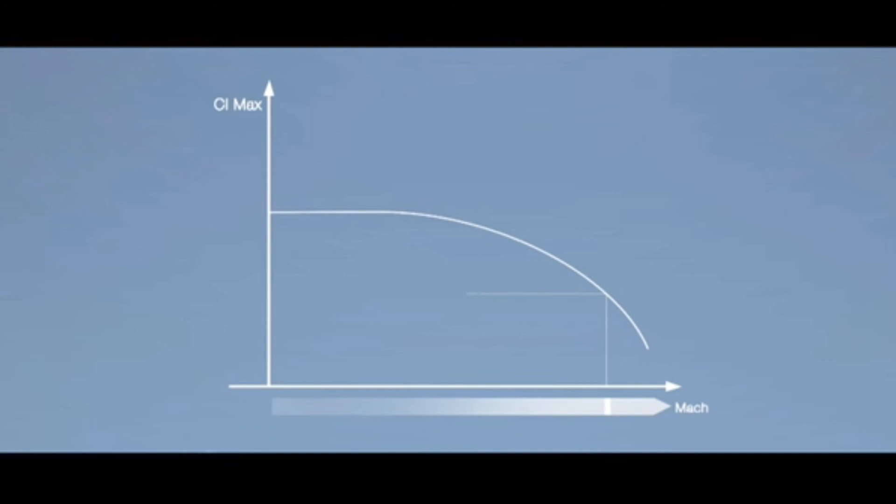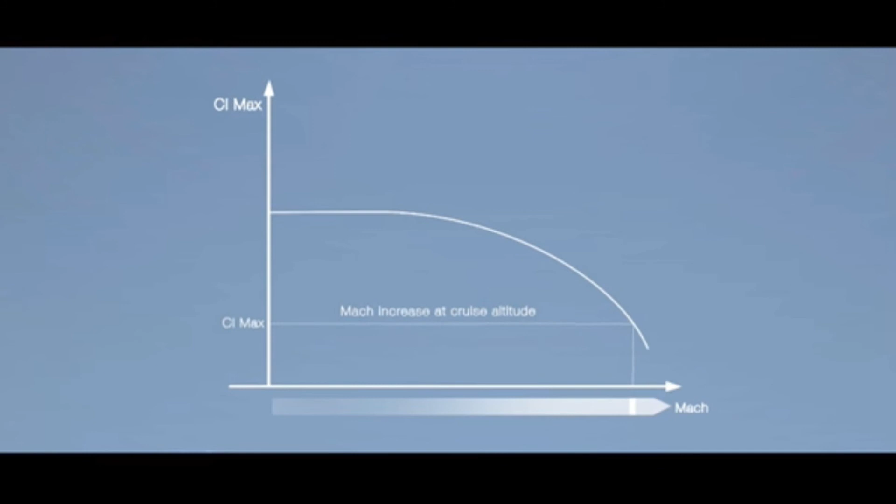At a low Mach number for a given configuration, a wing stalls at a given angle of attack. Beyond a given Mach number, on the order of Mach 0.35, any Mach number increase has two consequences: the angle of attack at which the wing stalls decreases, and the maximum lift coefficient, obtained at stall angle of attack, decreases as well. This means that at high altitude, where Mach effects become significant, the margin from stall decreases. In other words, in a high-altitude cruise, when the Mach number increases, the lift capacity decreases—that is, the load factor capability decreases, as does the ability to maneuver.

Let's now take a look at particular stall phenomena. Accelerated stall: an accelerated stall is caused by abrupt or excessive control movement. It can occur during a sudden change in flight path, during maneuvers such as steep turns, or a rapid recovery from a dive. It is called accelerated stall because it occurs at a load factor greater than 1g.

Secondary stall: a secondary stall may be triggered while attempting to recover from a stall. This usually happens as a result of trying to hasten the stall recovery, either by not decreasing the angle of attack enough at stall recognition or stall warning, or by not allowing sufficient time for the aircraft to begin flying again before attempting to regain altitude loss.

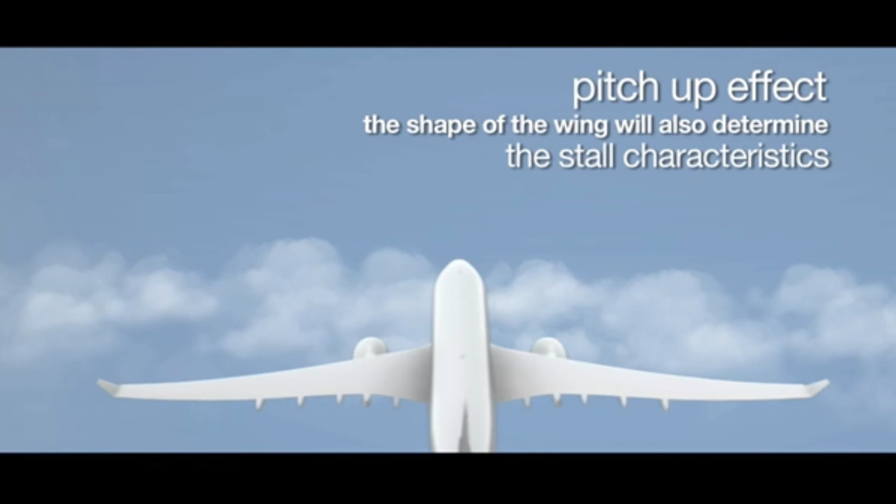Pitch up effect: the shape of the wing will also determine the stall characteristics. Modern jet aircraft have swept back wings. This kind of wing allows higher speed, but it has an increased tendency to stall at or near the wingtip first. The loss of lift at the wingtip moves the center of pressure forward, thus inducing a pitch-up moment.

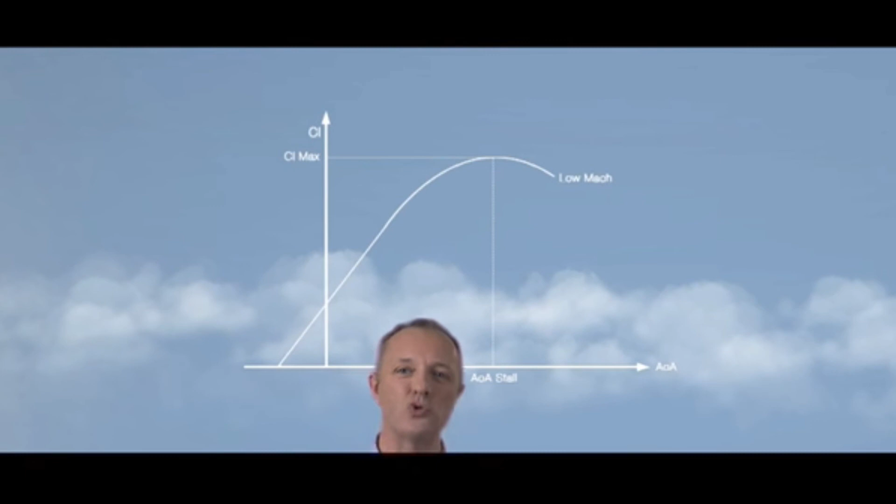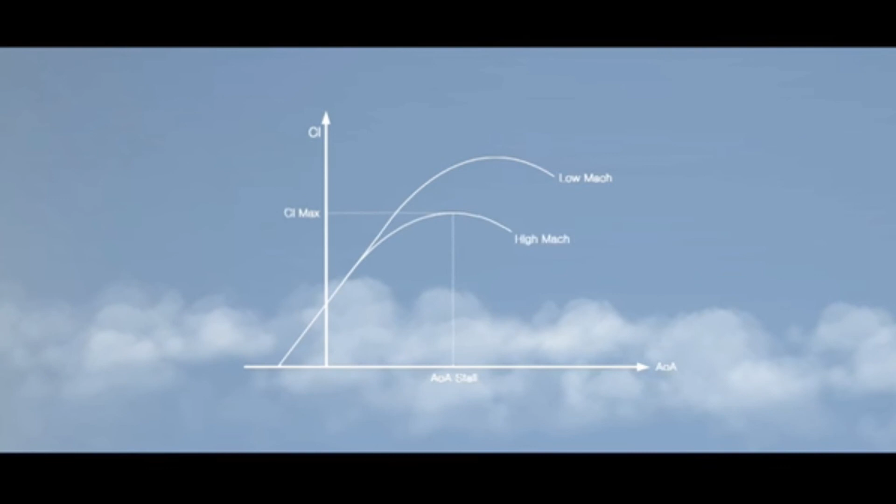So, what do we have to remember? For a given Mach number, a wing stalls at a given angle of attack. When the Mach number increases, the value of the angle of attack stall decreases. When approaching the angle of attack stall, the wing generates a certain level of buffeting, which tends to increase at a high Mach number. When the angle of attack increases and approaches the angle of attack stall, in certain cases, a phenomenon of pitch up occurs as a result of the change in lift distribution on the wing.

When the flow over the wing is stalled, the only possible means to recover a normal flow is to decrease the angle of attack to a value lower than the angle of attack stall. Stall is only an angle of attack problem. It is not directly a speed problem. Remember these last two points.

So, that's the theory. But how does it work in practice? For this, we've decided to use a production A330, representative of aircraft in service.

Let's start with deterrent buffet. Deterrent buffet is a phenomenon which happens at a certain stage in a stall. It is so strong that it can be dissuasive. It should be noted that the definition of deterrent buffet is part of the stall definition as specified in documents certified by the civil aviation authorities.

Buffeting starts gently and gradually increases until the pilots decide to recover. Note that buffeting is hardly perceptible at all when the warning is triggered, but builds up quite quickly to a very harsh level.

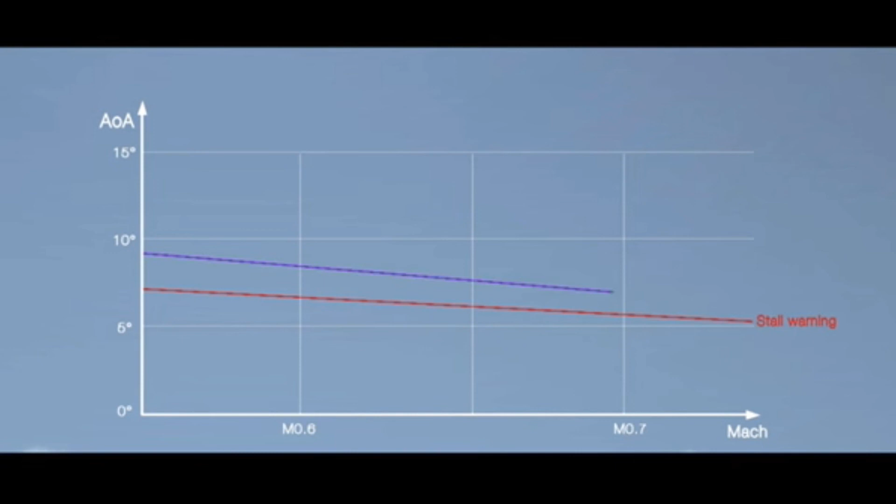In this graph, you can see the angle of attack at which the stall warning will start as a function of the Mach number. You can note that the stall warning angle of attack decreases as the Mach number increases. There is also the curve showing the buffet onset. The zone above the stall curve is the deterrent buffet zone. You can see that as the angle of attack increases, we enter the different zones on the graph.

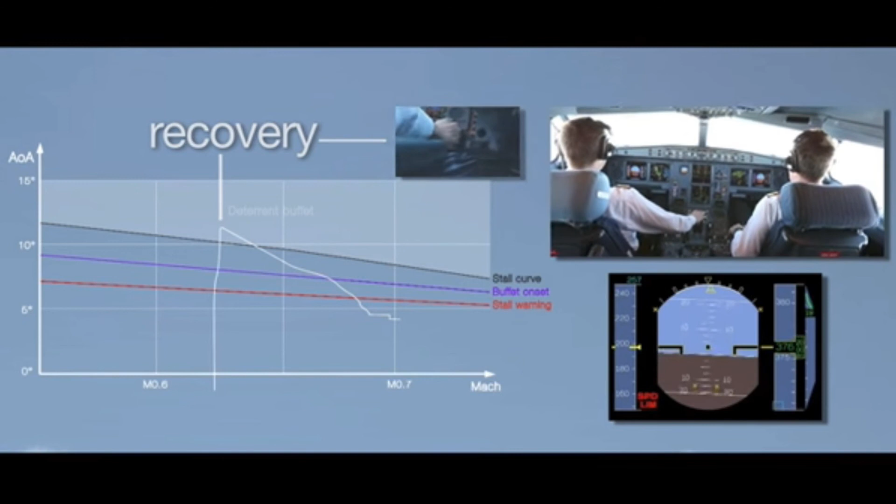Once the recovery is initiated, this deterrent buffet stops. You may also notice that the sudden change in angle of attack occurs as soon as the recovery procedure is applied.

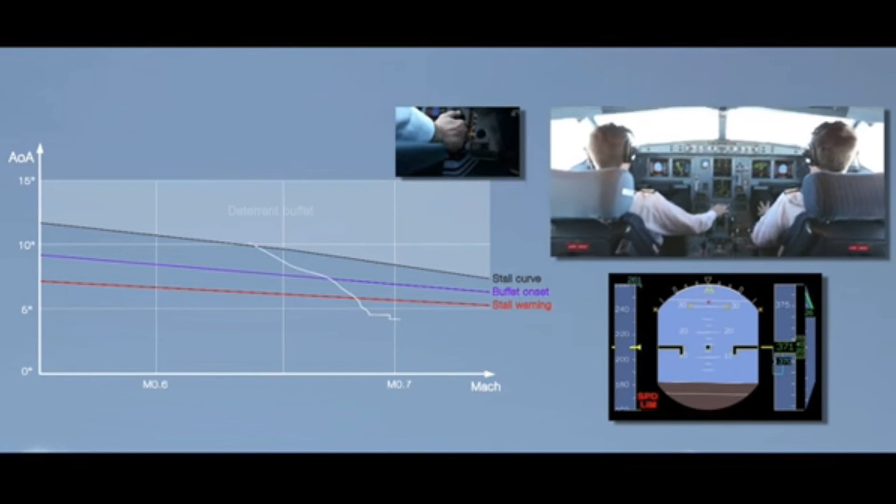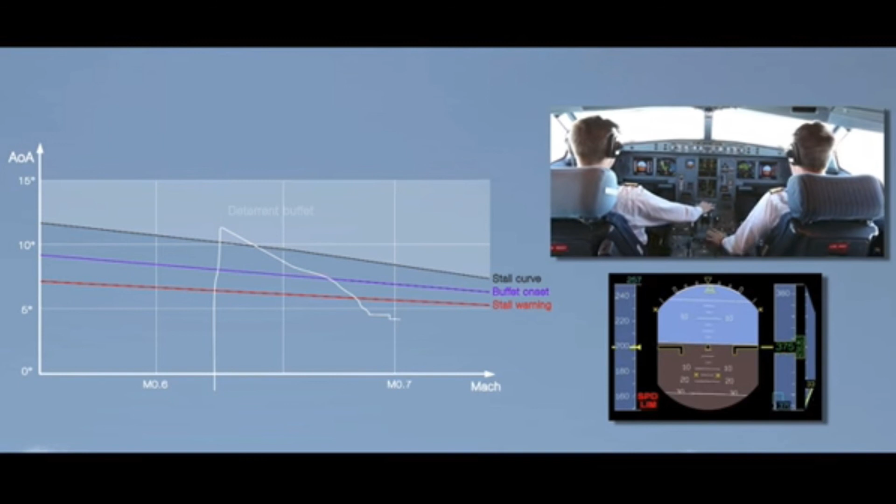Let's review this again. In the event of a significant uncommanded roll at the stall, reduce angle of attack before recovering the bank angle.

In this film, you have seen various theoretical and practical aspects of stall situations. The most important thing to remember is that, at the first indication of a stall, you must release the back pressure and, if necessary, push the stick forward to decrease the angle of attack until the stall indications are no longer present. Remember, it is always better to avoid a stall, but should you encounter one, strictly apply the recovery procedures published in your aircraft operations manual.